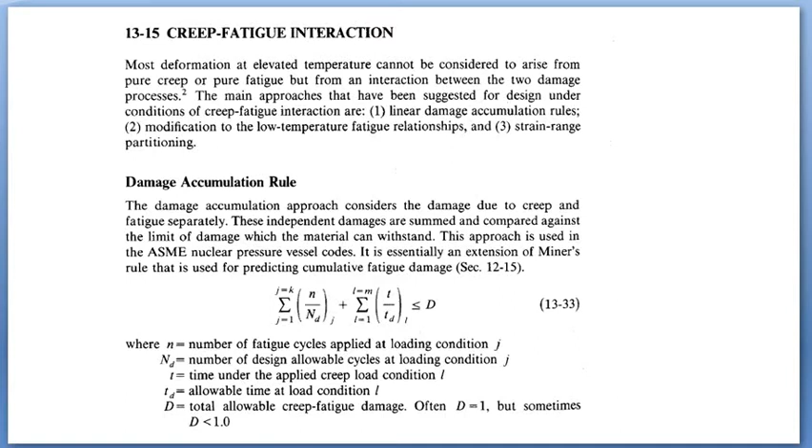So it is an interaction diagram at constant temperature. A related approach is to assume that the fatigue is caused by the alternating stress component sigma A, not the constant load, and then the creep is caused by the mean stress component sigma M.

So the concept of the Goodman diagram, you will remember, is modified in the manner shown in this fatigue creep interaction diagram at a constant temperature. In this diagram, sigma E represents the limiting fatigue strength at some designated number of cycles.

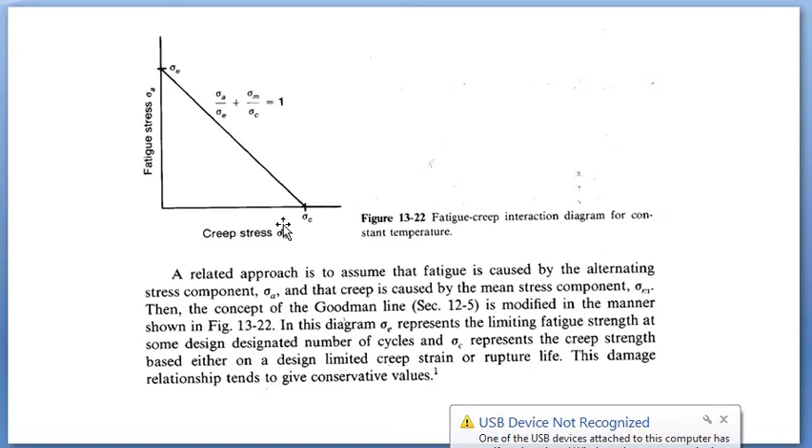And sigma C is the creep strength, and it can be based either on the design limited creep strain or the rupture life. So it is given by fatigue stress versus the creep stress. For fatigue stress we take the alternating stress, and for the creep stress you are going to consider the mean stress.

So sigma A versus sigma M, when you are going to plot, you are going to get a straight line, and it is given by sigma A divided by sigma E plus sigma M divided by sigma C equal to 1. So A is alternating stress, E is the limiting fatigue strength, M is the mean stress, and C is for the limiting creep strength. So this is the first approach or the first concept, damage accumulation rule.

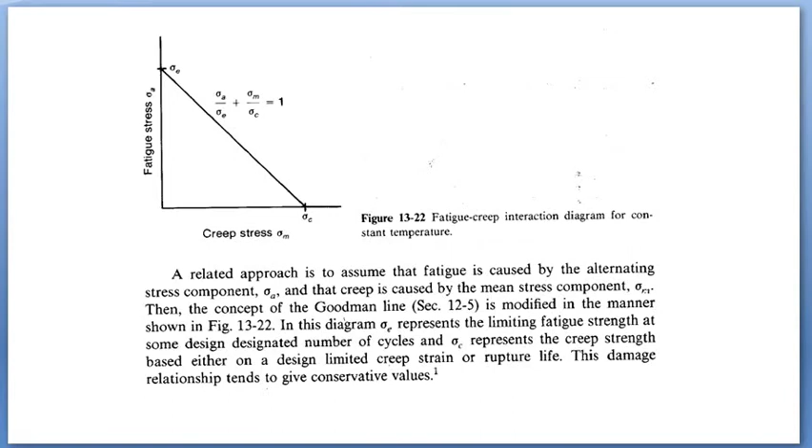Next concept is going to be the modification of the fatigue relationships. Because of the importance of the environmental effects in high temperature fatigue, it is important to introduce the time dependency.

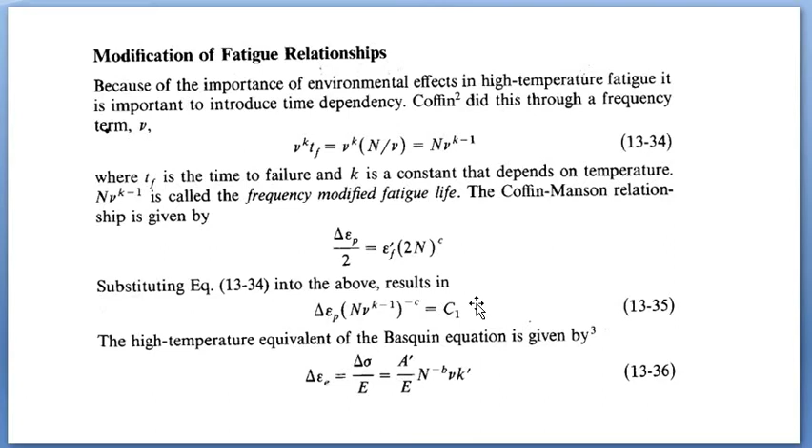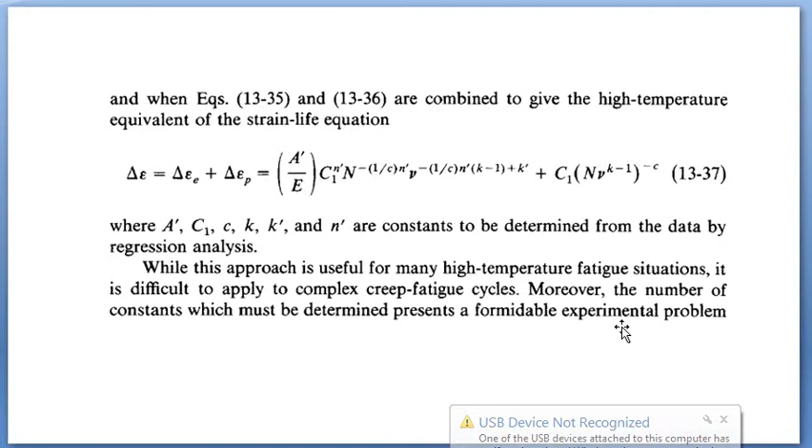When you are going to bring all these towards this side, and on summation what is happening, that is the final thing. So where these all are constants to be determined from the data by the regression analysis. While this approach is useful for many high temperature fatigue situations, it is difficult to apply to complex creep fatigue cycles. Moreover, the number of constants which must be determined presents a formidable experimental problem.

In the regression analysis and in the statistics, I don't know whether in fourth sem you studied it or not. It's like a statistical method. In it, using the dependent variable and independent variable, you will be finding out what is the relationship between them. That is the regression analysis.

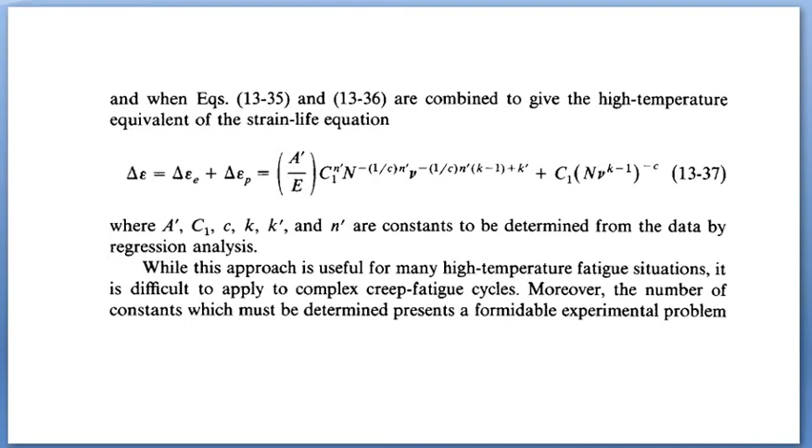So coming into the last one, which is the most important one, this is the strain range partitioning. Instead of explaining this entire theory at length, I'll just move on to this diagram. Based on this diagram we have to explain it. So this is your strain range partitioning. For strain range partitioning, just look at the first 3-4 lines. I will just tell you, and then based on the diagram I will explain it.

The strain range partitioning method is based on the idea that any cycle of completely reversed inelastic strain can be divided or broken into 4 distinct strain range components. So this is possible only with completely reversed inelastic strain, and it has been divided into 4 parts. Del epsilon pp means completely reversed plasticity, so pp is plastic both. The next one is del epsilon pc, which is tensile plasticity reversed by compressive creep.

Now there are 2 letters here, pc, pp, cp, cc. The first alphabet will indicate the deformation in the tensile part, and the second letter the deformation in the compression part. So first alphabet is always for the tension, next one is always for the compression. So del epsilon pc is tensile plasticity, p stands for plasticity, reversed by compressive creep. Small c stands for creep.

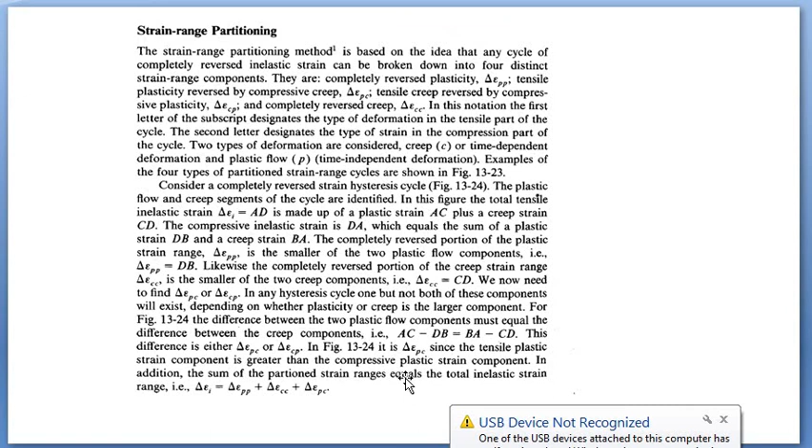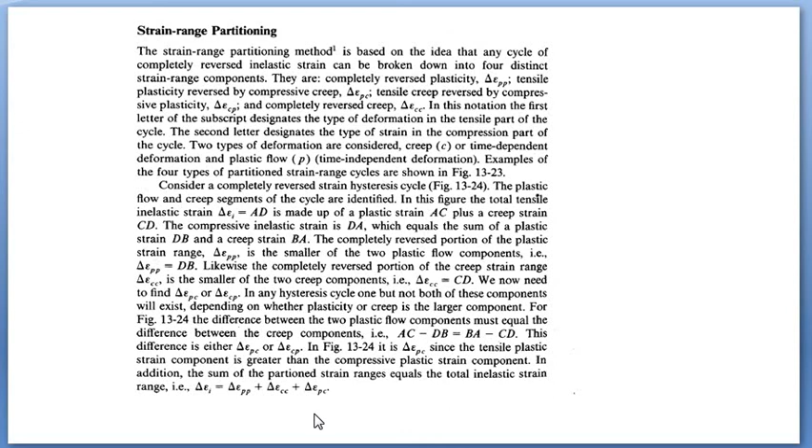So this is how we have found: plastic reversed by plastic itself, creep reversed by creep, creep reversed by plastic, and plastic reversed by creep.

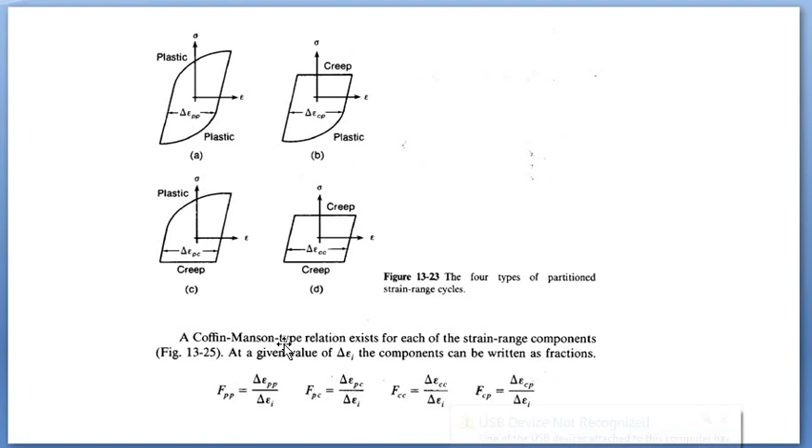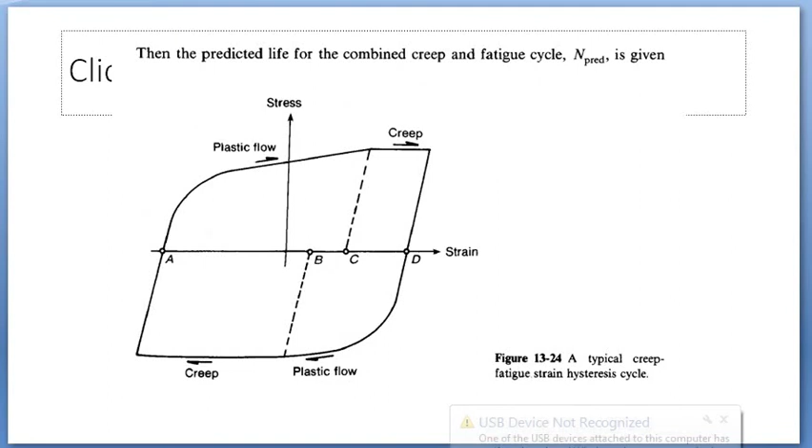Interaction damage rule. Before that, a Coffin-Manson type relation exists for each of the strain range components. So at the given value of del epsilon I, the components for each of the partitioned strain range cycles are written like this. After that, the predicted life for combined creep and fatigue, N predicted, is given by the interaction damage rule: 1 divided by N predicted equals FPP by NPP plus FPC by NPC plus FCC by NCC plus FCP by NCP.

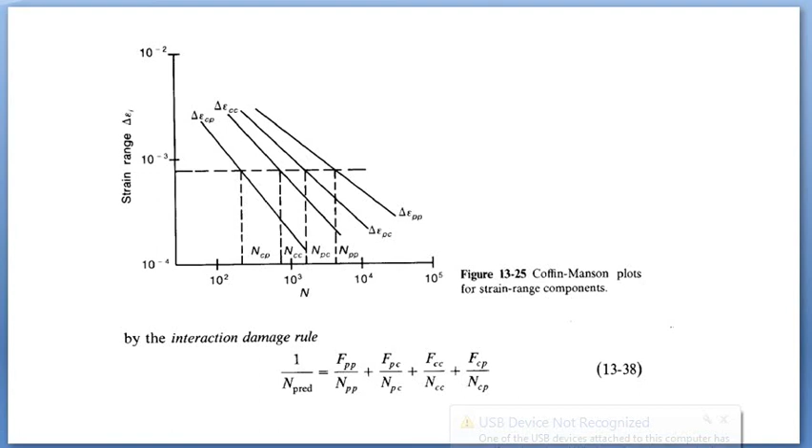So with this, the last unit, our creep unit, is over, and the fatigue-creep interaction is also over. Thank you.